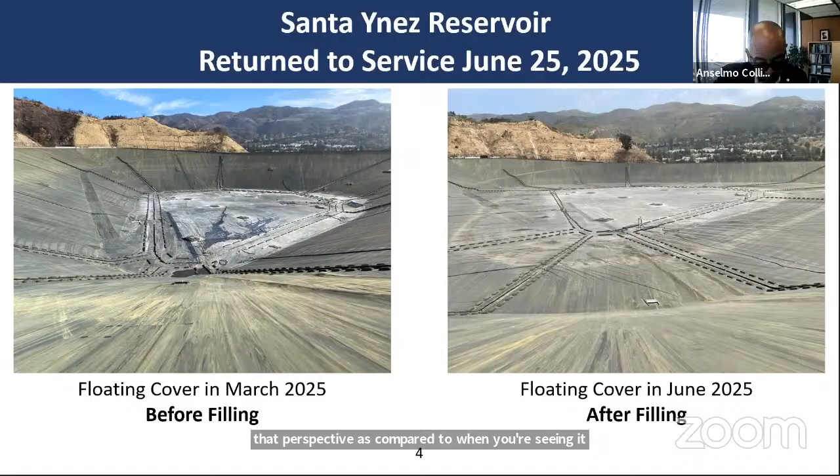The reason why we need to have this cover, and I know that questions come up many times from different people, is that we are required to comply with federal and state regulations for water quality. Keep in mind, once again, this is a drinking water reservoir that, in addition to providing drinking water, also provides water for the fire hydrants. But the primary duty is a drinking water reservoir, and we're required to comply with these regulations.

The regulations are to protect two of them. One is to protect finished water, which is what this is, from having any kind of contamination because they're exposed to the environment, meaning animals, birds, anything that can get into the water and contaminate it. The floating cover protects it.

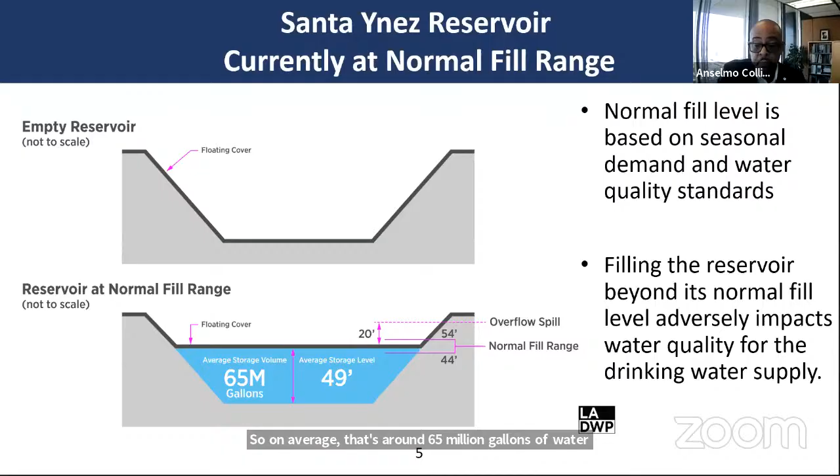Let's go to the next slide, please. Great. So once again, just reiterating that the Santa Ynez Reservoir is a drinking water reservoir. The cover that we have here is required for us to be able to meet all regulations, both at the state and federal level. The replacement of the cover is needed due to the repeated tears that we see in the cover. So I want to talk about that a little bit in a minute.

We do need specialized services to design and install this cover. And we are working right now on preliminary planning and conceptual design for replacement. So I can tell you that as of yesterday, the Board of Water and Power Commissioners approved a contract for a design company to design the new floating cover. And hopefully you recall from the previous town hall that we're going to put a new floating cover over Santa Ynez Reservoir.

That is a short-term solution that we want to implement because we recognize the existing cover is compromised. However, we are looking at more permanent solutions that we're going to be implementing. Right now, my planning team is looking at a variety of options. Some of the options, as I mentioned before, include putting a hard cover over the reservoir. It could be perhaps an aluminum roof or a concrete cover. We're also looking at potentially replacing the Santa Ynez Reservoir with tanks that could be placed either in the same location or nearby.

And the other option we're looking at potentially is building a treatment facility that would allow us to not have to have a floating cover, have the water go through the treatment facility and then into the system. All these options take quite a while to plan, design, and construct. So the idea is that by having now the floating cover replaced with a brand new one, that will give us the time to be able to do the proper engineering and the proper investigation to come up with the best solution. Like I said, our board just approved the contract for design.

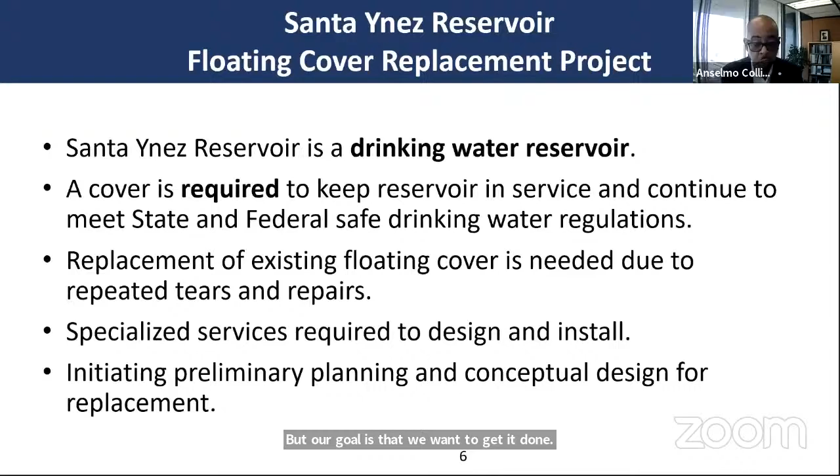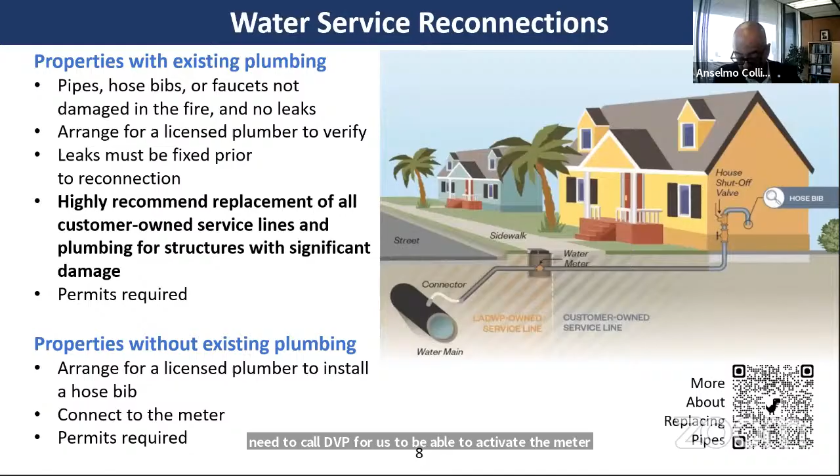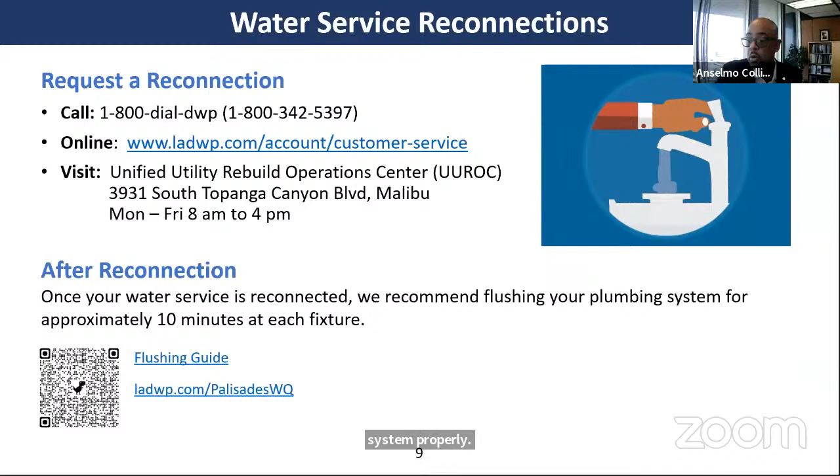Thank you. Thanks, Anselmo. Good evening, everybody. My name is David Hanson. I'm the Senior Assistant General Manager for the Power System for LADWP. I'm Anselmo Collins' counterpart for the Power System. Next slide, please. Oops. I think go back one more, I believe.

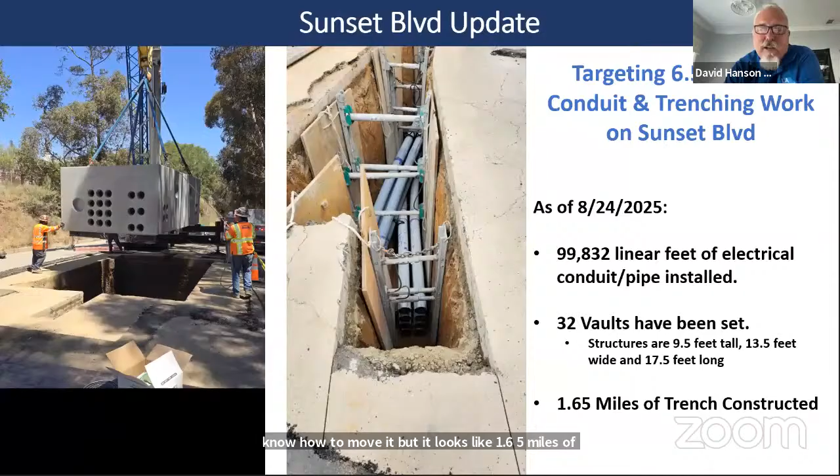Okay, so this is a picture of the panel that we're requiring. So we have got a lot of questions from the community about when will we be in the residential areas for undergrounding. Right now, our tentative schedule for undergrounding off of Sunset into the residential areas is approximately third quarter of 2026. It does take a significant amount of time to design all of this and do the other installations and the work and equipment procurement.

So in the meantime, what we're asking builders to do, for anyone that's building a new house, is to set a meter panel referred to as what we call a combo panel. It has an overhead and an underground feed. It's essentially the same panel that you can buy at Home Depot. There's usually an adapter kit for going overhead or an adapter kit for going underground. And then you would run a 3-inch PVC line out to the front of the property. It's got to be a minimum of 3-foot depth.

All of this equipment altogether, the electrical panel is the same cost as it would be if you just ran it overhead or underground, so the combo panel is essentially a wash. And then everything all together, we conservatively estimate is about $350 in material that should be able to be absorbed into the rebuilding cost of your property. These are some rough sketches of what the requirements are.

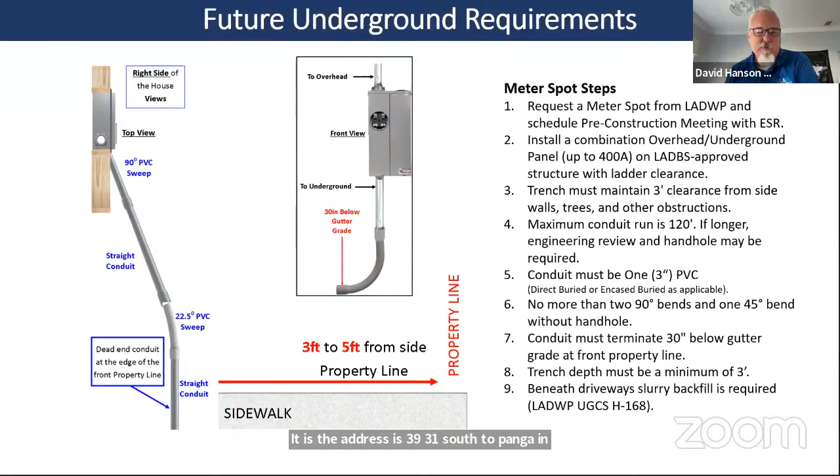We do have this piece of equipment mocked up at the UROC, the Unified Utility Rebuild Operations Center, along with some of the other equipment that's going to be related to the new circuits that we're pulling into the neighborhood once we shift from overhead to underground. So anybody who wants to see this stuff for yourself up close and personal, you can swing by the UROC there on Topanga. The address is 3931 South Topanga in Malibu. And that's where we have all of this mocked up. So next slide, please.

So again, another rough sketch. We have a lot more detailed drawings available through our service planning and through the UROC. So anybody that has very specific questions, builders that are familiar with electrical, again, please come visit us at the UROC and we'll give you the details.

The simple version here is showing the house, showing where the panel would be on the house, and this is for residential, anything up to 400 amps. We just have a PVC conduit. Again, it's 3 inches, minimum of 3-foot depth, ran out to the property line, and then we would plug it at the curb and then come back later when we do the undergrounding, then we'll intercept at that time.

So the simple rule of thumb, the maximum length of the run is 120 feet. Anything longer than that, the engineers have to review. Bends, we don't want to see any more than two 90-degree bends plus a max of up to 45-degree sweep. After that, we would have to have a hand hole to intercept to make the run longer. And again, 3-foot clearance from the side lots, trees.

We do need a meter spot and an ESR inspection before you cover it back up. If you're not running underneath a driveway, then you don't need concrete encasement, but all of that can be covered in detail through our meter spot and our ESR inspection process. And then slurry backfill, just what I was talking about. If you go under a driveway, we do require some form of concrete. That's just a commercially available mix, nothing too fancy.

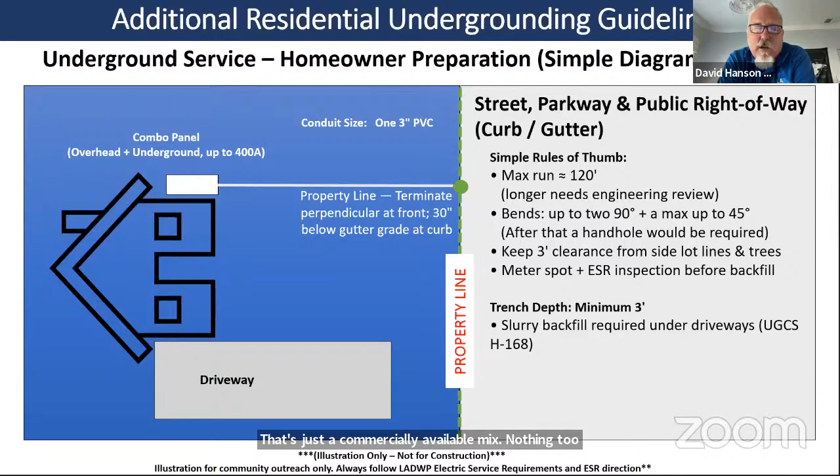Next slide, please. So essentially, when to request a building clearance from LADWP. So if you have a structure that gets closer than 15 feet of existing power lines, think of a balcony in your backyard or any sort of structure that would get within 15 feet, then there's an encroachment application if you plan to build. We submit that. Real estate and encroachment staff will review. Somebody's going to come out to actually look at what it is that we're trying to build.

This is particularly a concern when we have an existing power line and say, for example, we are building something new on an existing commercial lot. A lot of times this has to do with stairwells and balconies. And it's all about public safety. We just want to make sure we have governmental requirements, GO 95 regulations, where we can't get anything closer. We have some safety requirements that are set. So we say 15 feet, you're good.

Anything closer than that, you're going to have to do an encroachment request, and a pole spotter is going to have to come out, and people are going to have to check out exactly what you're building, and review and approve. You can see the email and phone number as well as the website there on the bottom bullet for anybody interested in the encroachment application. Again, this information is available at the UROC and also available at ladwp.com. Next slide, please.

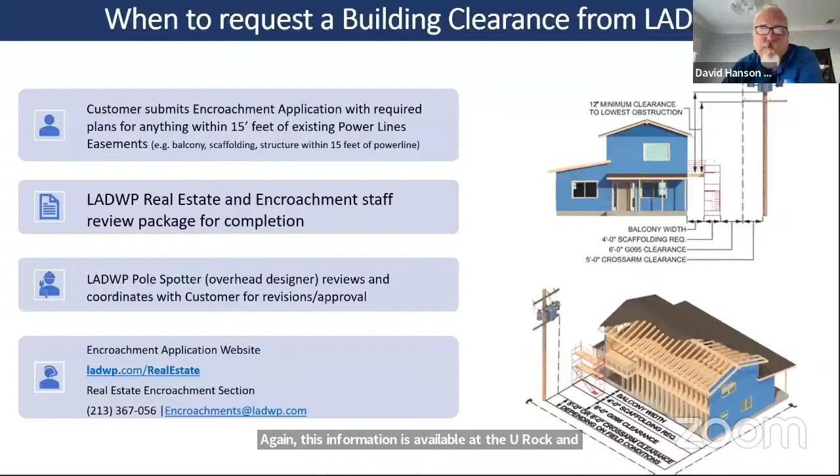Next slide, please. I just got a text that maybe our number for pole spotting is wrong, so we'll make sure we get that correct number out to the community. And again, the UROC is our one-stop shop for all this information.

So overhead residential service requests up to 400 amps. This kind of walks you through what our process is. The customer submits the plans online before construction starts. And then once we receive it, we work together and assign a project to one of our electric service reps. That's our meter inspectors that come out to make sure that the meter is correct and where it needs to be. The ESR will review that plan and then they'll schedule the spot with the customer.

We usually look at around 2 to 3 weeks to come out and actually visit the site. They check out where we are planning on installing the meter, and then they give the construction requirements to the customer or to the builder. And then once the customer construction is complete or the builder has done the completion, then DWP would release the meter and say, okay, we're ready to install a meter release once the building and safety has come out and done their inspection as well.

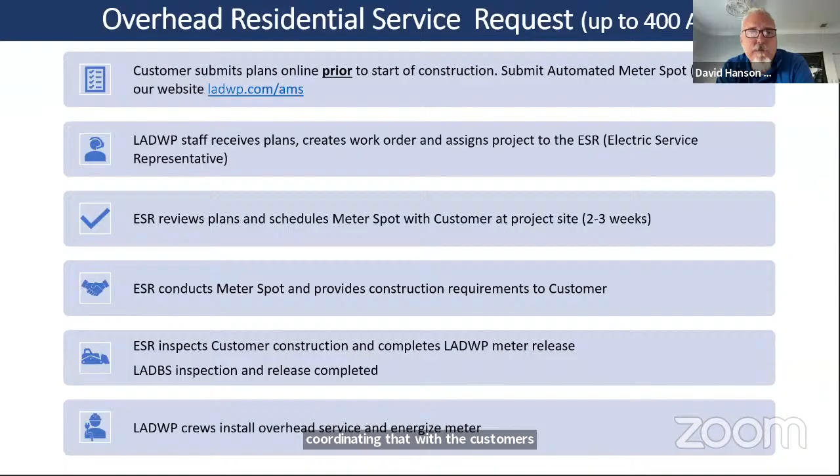I think this is the same slide.

We are overhauling our customer interconnection process so that we will have a single point of contact. For our larger non-residential customers, we understand that this has been a pain point for us for many years. So an overhaul of that entire process is way overdue. We're calling it the new business concierge service. So anybody that's building a large commercial or anything other than residential will have a single point of contact.

We won't be handing you off to different groups to do construction and review, and you'll have one person that'll see your project from beginning to end. So we're very excited that that process is going to be in place here very soon. We've hired personnel for these new roles. We're also rolling out some engineering staff to do the planning and scheduling in the operations groups, and we hope to have all of that up and running here in the next month or two.

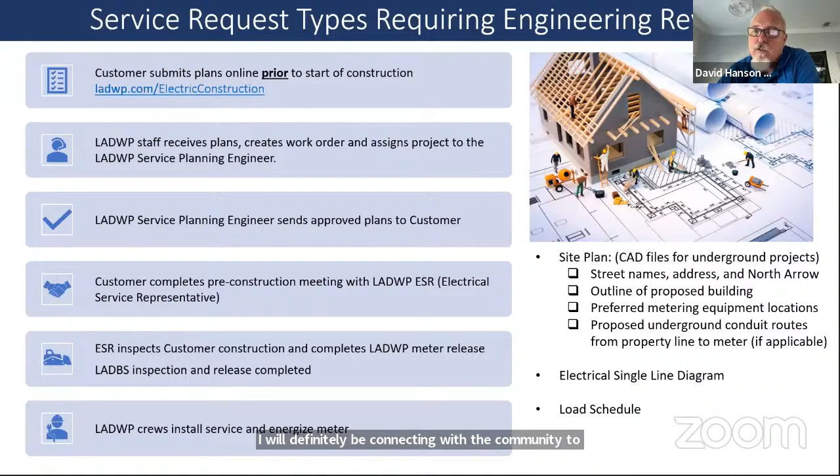We'll definitely be connecting with the community to shake out the bugs on this and get some feedback so we can do continuous improvement. Next slide, please.

Okay, so that's it for me. I know we'll all be hanging out for Q&A at the end of this. And at this time, I'd like to introduce my friend, Joe Ramallo. He is our Chief Customer Officer and also the best friend you could ever have right before you go live on a camera. Joe. Thanks, Dave. I appreciate it. Let's go to the next slide. Appreciate everyone joining this evening.

Wanted to take just a couple minutes to give you an update on our billing. As you know, at the last meeting, I had mentioned that we had to clean the meter boxes, do some hazmat remediation at all of them. That was completed. We began billing for our monthly billed customers, which are commercial customers, the last week of July, first week of August. So that first billing cycle for those customers is complete.

And we are now at the point where we are reading meters and sending bills out for residential customers in the Palisades. Those meters began being read on Monday, and bills began going out yesterday. In addition to that, last Friday, we mailed a letter out to all residential customers explaining what I'm covering this evening. And we will also have information posted by tomorrow morning on our website that also explains all of this and answers some frequently asked questions about our billing. It is just a little bit complicated, so I want to walk through it piece by piece for you as quickly as I can.

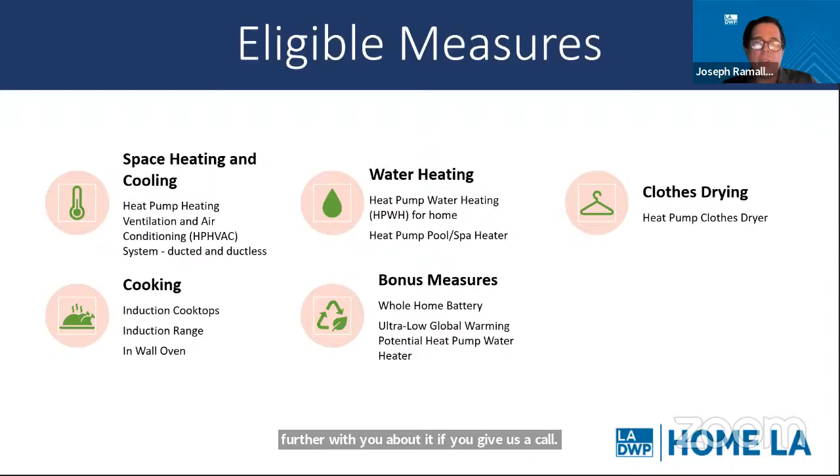I'll go ahead and switch to the next slide. This includes things like space heating and cooling, cooking, water pumps, whole home batteries, clothes dryers, or water heating. We have information on this on our LADWP.com/Palisades page. You can scroll down to the bottom, and the Home LA program has a fact sheet there. We are happy to speak further with you about it if you give us a call at 1-800-DIAL-DWP and get you through to the right staff to walk through and answer any questions that you might have. Next slide.

There's specific amounts and incentives per housing unit, both for single family as well as modular housing. Go ahead and go to the next slide. And again, these are the various measures that are included. I do have our Executive Director of Distributed Energy Solutions on the call tonight if there are any specific questions, either in the chat or in the discussion, that we can answer.

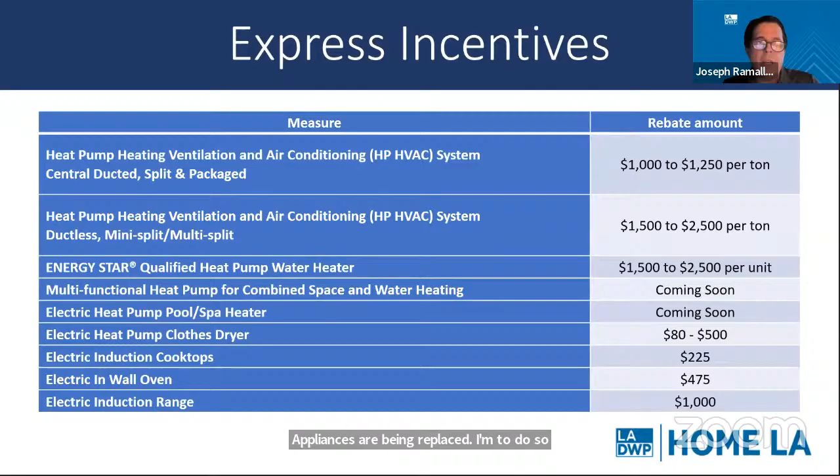We very much welcome people to participate in this. It's something we put together very quickly with funding to really give you an option here, as homes are being rebuilt, as appliances are being replaced, to do so with a little help toward that bottom line. Go ahead and go to the next slide. And again, there's additional aspects of this that I won't get into the details of now, but they are all available on our fact sheet on our website as well. Next slide.

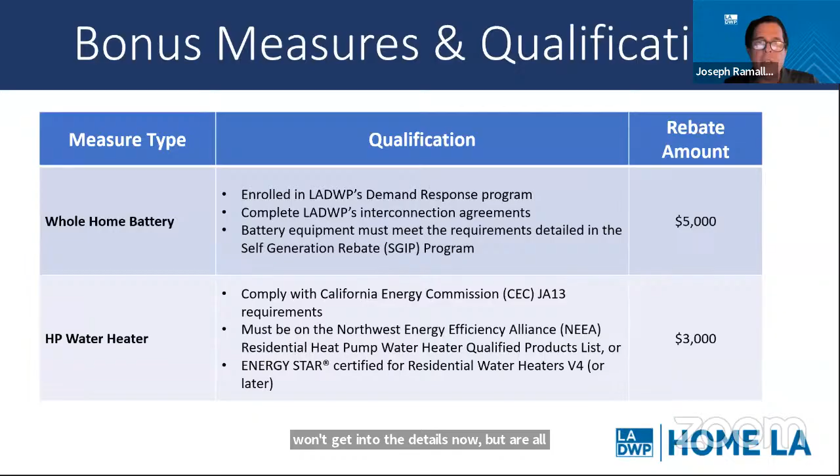I believe that's the end of my presentation. Stephanie, do I have additional slides there? Just want you to please stay connected with us. We're trying to keep our information updated as quickly as possible on the Palisades webpage. We're also available at the UROC for in-person visits to answer any questions that you might have. I have customer service reps who are available there to help with any billing issues.

And if you do receive a bill that's confusing, you feel that it's wrong, we want you to call us. Please, we know these are very difficult circumstances and times. And we also want you to know that we have shut off any late notices and disconnection notices through the remainder of the year while we get caught up with things like this credit for the solid resource fee, and also make sure that everyone understands the charges that are on their bill, what's included there, and certainly to give a grace period here for payment.